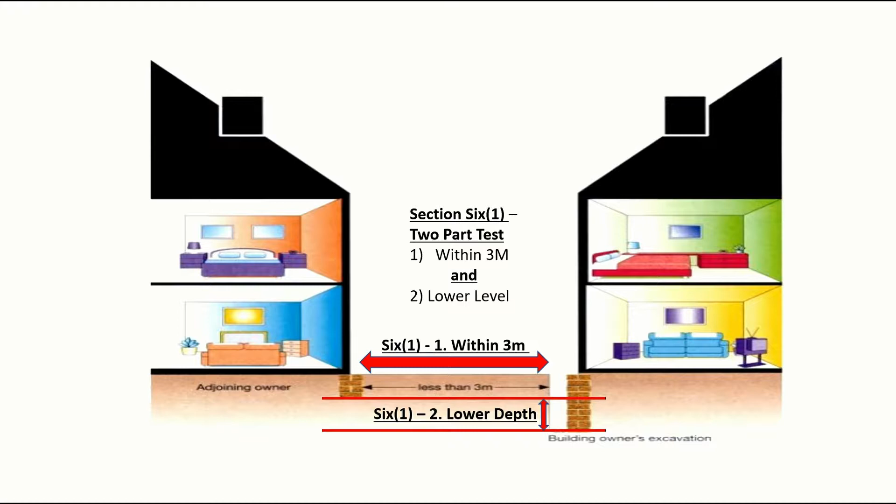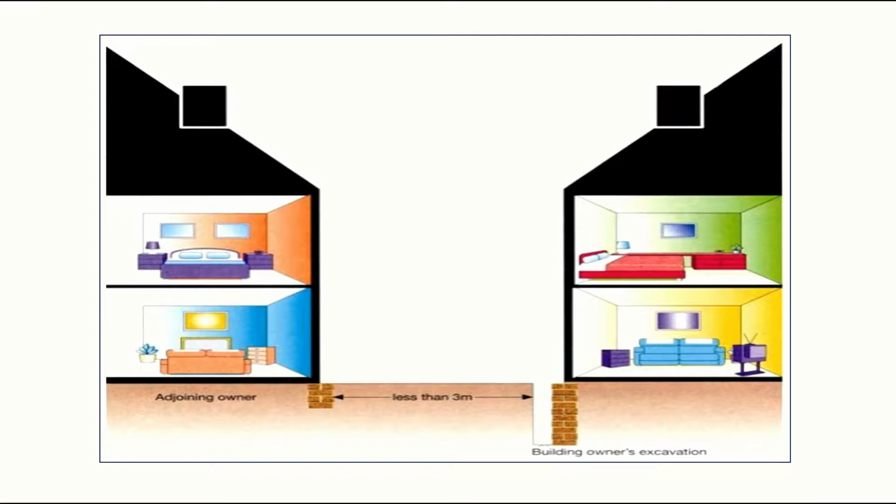Second part, if the excavation is going to a lower level when measured vertically from the ground compared to the original foundations of the building within 3 meters. There is also a Section 6(2) notice, which is more for probably basements and so forth, and comes into force where the excavations are deeper. The 3 meters are measured horizontally at ground level.

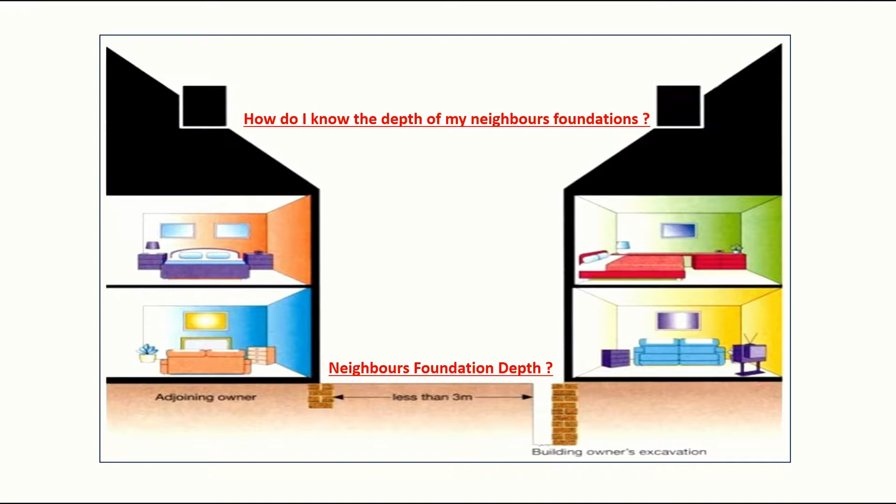Now the next question that comes into mind is, how do I know the depth of my neighbour's building's foundations? Following the heat wave of 1976, due to foundations being quite shallow before that, various buildings showed cracking in the foundations, so building control regulations were changed, and from then onwards any buildings have a deeper foundation. So if the building you're thinking is notifiable was built before 1976, it's likely that those foundations will be very shallow, and hence they will be notifiable if they're within 3 meters.

If in doubt, it's better to serve a notice in order to avoid delays and disruption to your project. So the cut-off line in mind should be 76/80s. Hence, any buildings built after the 80s are likely to have a deeper foundation, therefore may not be notifiable, at least under Section 6(1). If in doubt, it's better to serve.

Now, where your house is a terrace house, it's likely that the owners of buildings on both sides will be notifiable. Who are the notifiable owners will be discussed separately as well, but just to touch upon the subject here, if it's a terrace house and you're building a rear extension, you've got two buildings that are notifiable, left and right, assuming the excavation's within 3 meters.

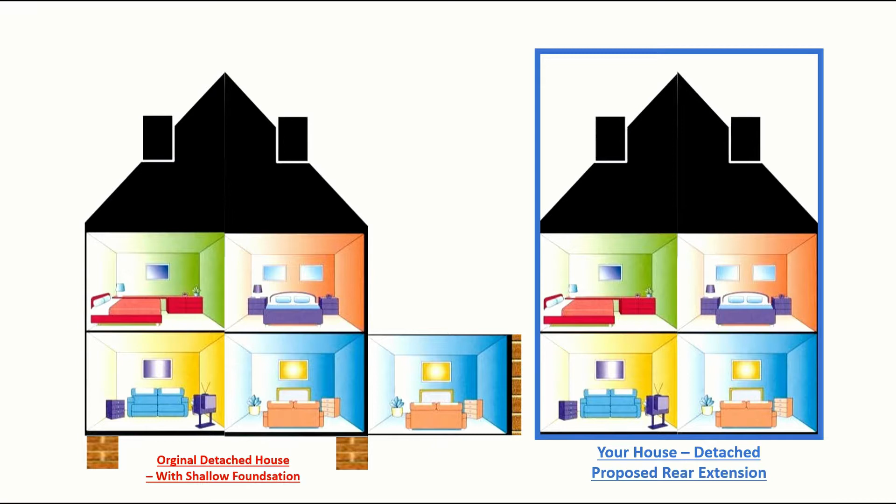Lastly, detached houses. Again, a house may be detached, but if it's within 3 meters of your excavation, the owners of that house or building are notifiable. Again, if it's split into flats, the leaseholders and freeholders are also notifiable. And repeating previously, if there's been a building built since the original house and the original house is still within 3 meters, the owners of that building are notifiable. Again, if it's flats, the freehold and the leasehold owners are notifiable.

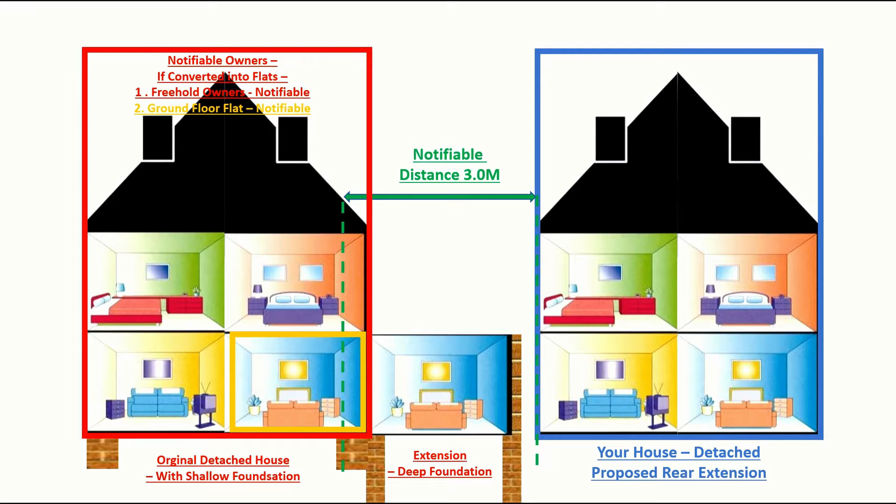The other point to remember when you're doing a rear extension, if you're connecting your original house to the extension while removing a rear wall, sometimes this rear wall is removed by inserting a steel into the party wall or inserting box-frame goalpost steelworks, and will require either cutting into the party wall or fixing into the party wall. This is notifiable under Section 2 of the Act.

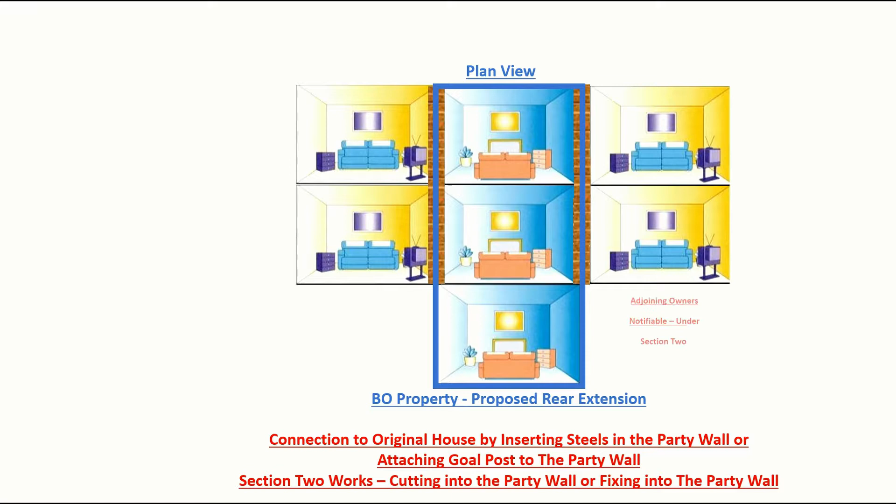Section 6 notices are notifiable with 30 days notice, which can be decreased if the adjoining owners agree. Section 2 of the Act is a 2-month notice, and again can be decreased if the adjoining owners agree. For rear extensions, Section 1 notices may also need to be issued.

Loft conversions or loft extensions. These seem to be the most popular type of works at the moment, probably because people are able to add an extra 1 or 2 bedrooms to their property, be it flats or houses. Although each loft conversion is individual to its own project, the most common factors are insertion of steels into the party wall to gain floor separation for the purposes of sound acoustics.